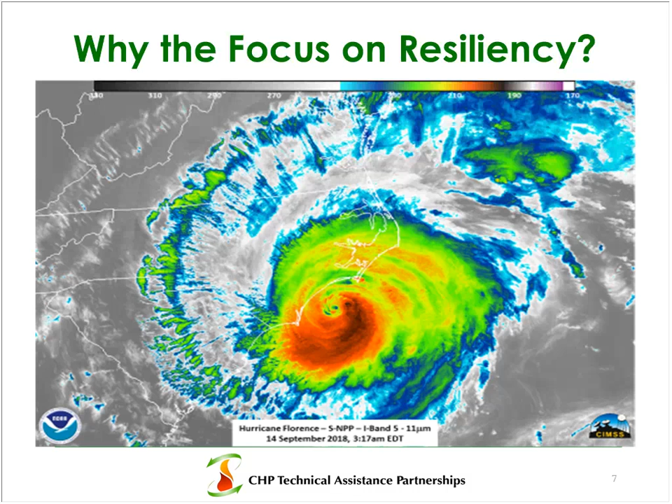This is a map of Hurricane Florence, which affected the Carolinas back in September. It seems like just a few weeks ago. Here's a really cool satellite image of the surface of the Earth. In the north is Virginia, the middle is North Carolina, and on the bottom is South Carolina and northeast Georgia, with a little part of Tennessee on the far left. This is about 3 hours before Hurricane Florence came ashore south of Wilmington, North Carolina.

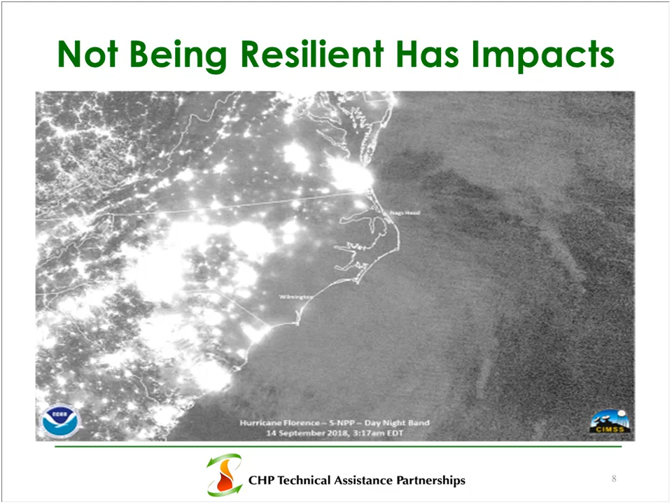The key thing is this: if you go down about three-quarters of the way, you can see a big blob - that's Charleston. Following the South Carolina coast up 26, in the middle is Columbia, then up 77 is Charlotte, with lights going up toward Greensboro. Heading right on I-40 there are lights around Raleigh-Durham, where we're located. But notice it's very dark around Wilmington, which is a pretty big city. That shows the impact to the power supply in the Wilmington area - that whole area was knocked out of power for several days. The storm just sat there for a while, and besides the flooding, it brought widespread damage to the power grid in that part of the state.

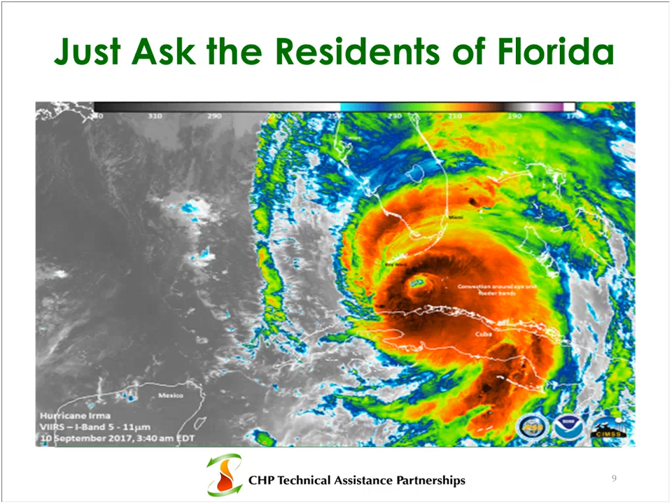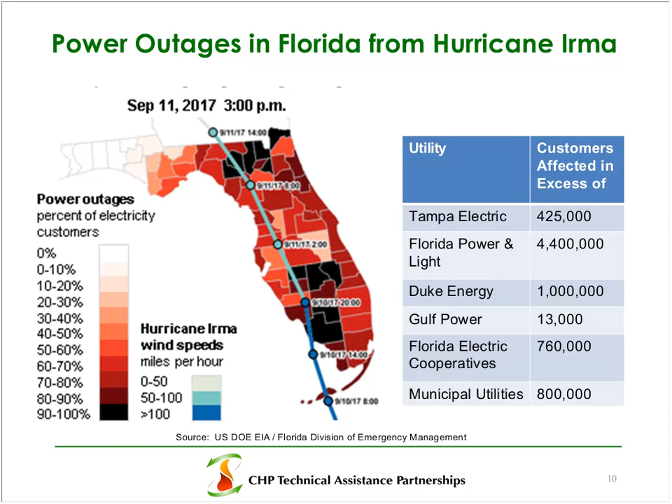Not only cost for production, but cost for raw materials—they get ruined, and so there's a large cost to industry when power is not reliable.

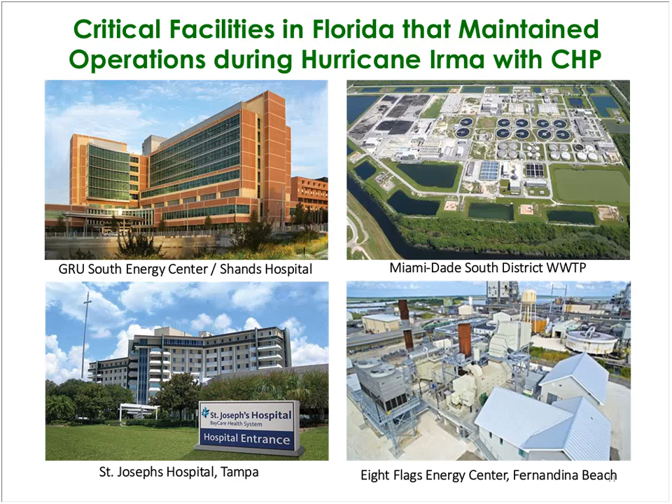It could be a fuel—in other words, what could make that type of energy source not work during certain types of severe events? It could be a fuel supply interruption, damage to equipment, performance limitations during certain types of weather or other extreme events, and then a planned or forced shutdown from that event.

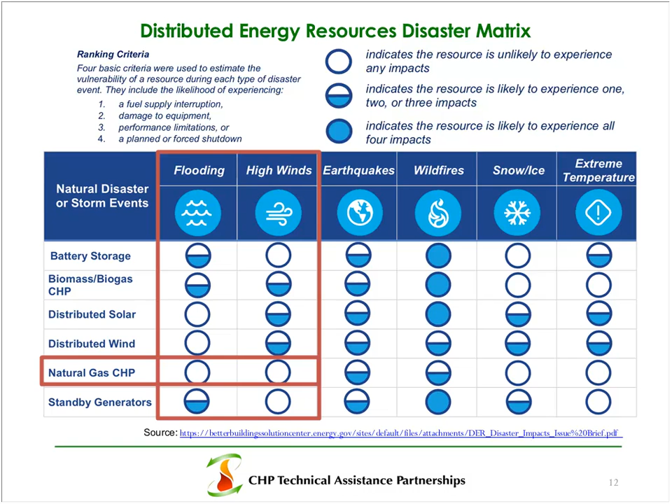So a little bit about how CHP works. First of all, CHP is a form of distributed generation, meaning that it is a source of energy that is located at or near the source of the demand for that energy. It could be on your site or it could be adjacent to the site.

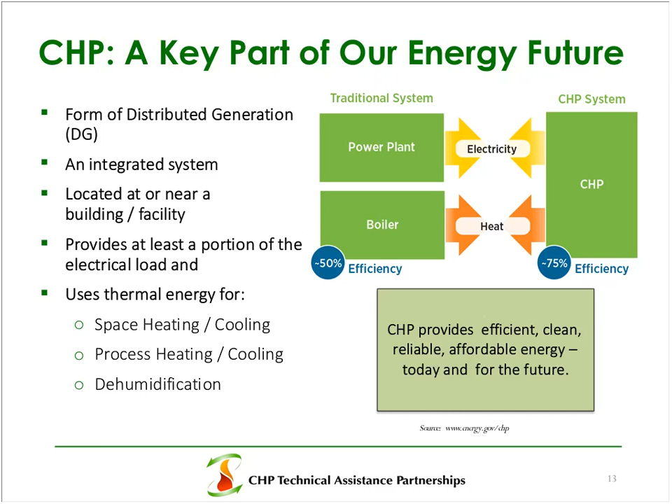So an existing power plant is about 32% efficient when you include the transmission and distribution of the electricity from the plant through the power distribution system to your facility, and then an on-site boiler. So if you're trying to create, say, in the middle there, 75 units of energy between the power plant and your on-site boiler, you require about 150 units of energy.

This is just generic units of energy. With a CHP system, you can provide the same quantity of energy, both thermal and electric, using about 100 units of energy. So there is a savings there. You're generating both the electric and steam or heat on your site.

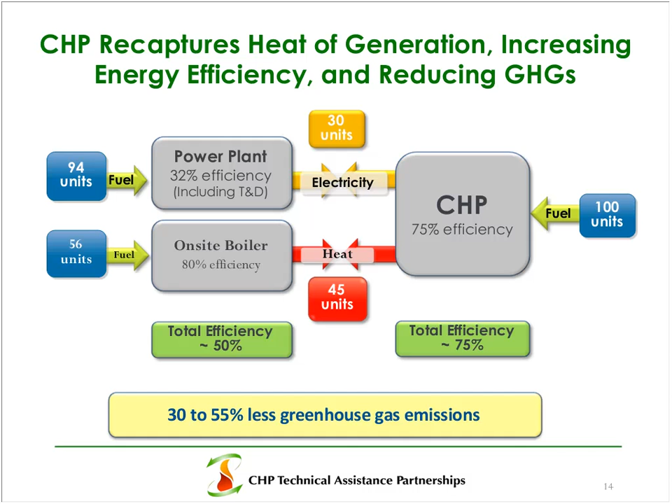And this is basically a simple schematic on how CHP systems operate. CHP systems can operate with any fuel, and our next presentation will be a great example of how it doesn't have to be natural gas or coal or fuel oil or whatever. There's lots of very innovative projects out there that utilize CHP to match their particular operations.

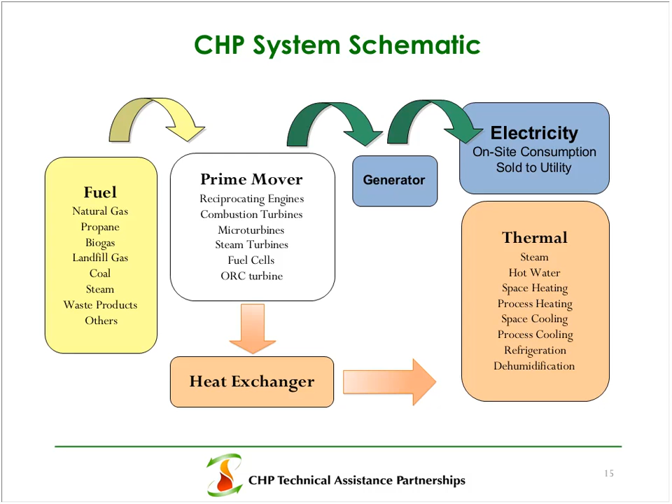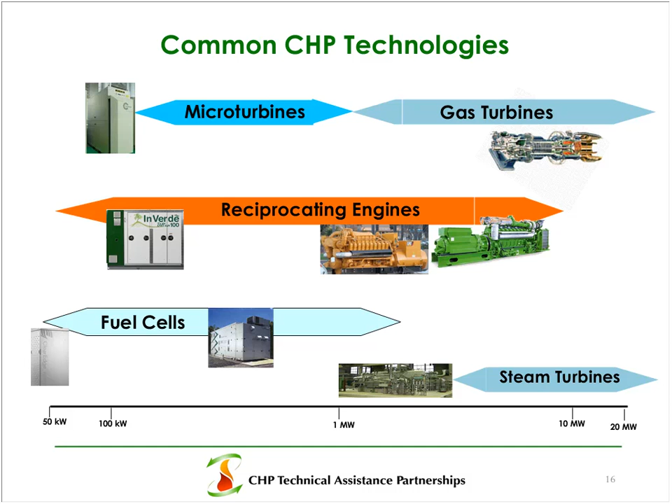So a little bit about some of the additional benefits. We've talked about the benefits of combined heat and power, and how it's a more efficient way of generating energy than the separate generation of electricity and heating or cooling. Its high efficiency translates to lower operating costs, but it also requires a capital investment.

Sometimes that becomes a barrier to CHP project development. We can have a whole separate webinar on financing options and incentives and other ways of helping with that capital investment. There'll be a link available after this webinar to some of the incentives available right now. But that's just incentives - sometimes there's local grants too, depending on your municipality or county. Higher efficiency also reduces emissions of pollutants.

We already talked about how it increases energy reliability, and in some parts of the country where there's grid congestion, it can help utilities manage that congestion by not having to rely on providing all the power needs of a facility - if they're a large electric consumer, if they can generate some of their own electricity.

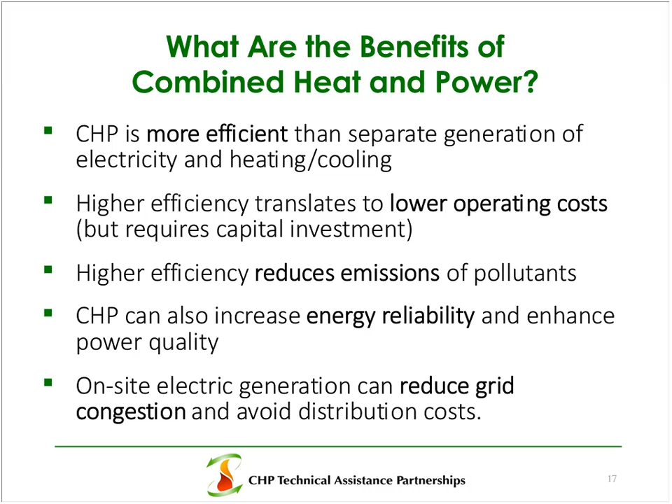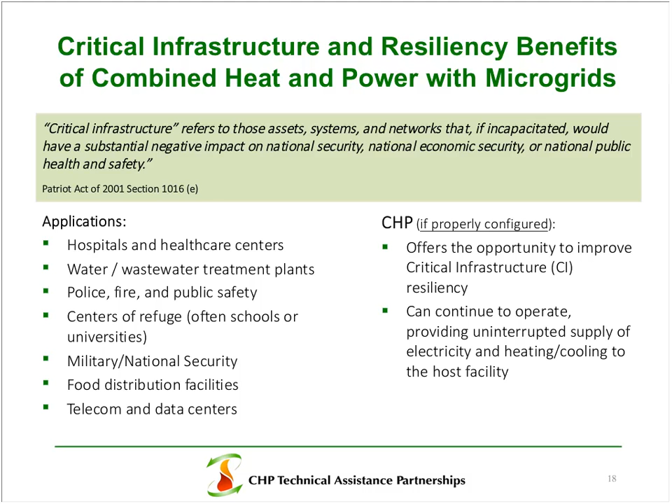Earlier I mentioned when we were talking about Hurricane Irma in Florida, things like schools and hospitals and centers of refuge and chemical facilities and other critical infrastructure. There's a lot of focus on how CHP can help critical infrastructure meet their overall mission, whether it's protecting people, providing that refuge, protecting lab experiments at universities or military bases, or food distribution facilities where refrigeration is needed. CHP is an opportunity for those types of facilities to maintain a source of electricity during power outages. There's lots of stories out there about facilities that have operated for 4, 5, 6 days on their own when the rest of the grid was out. So if it makes sense for your facility, it can be a great investment.

So let's talk a little bit about the current CHP market, first looking at the United States in general. There's about 4,400 sites around the country that currently operate CHP systems, representing about 81 gigawatts of energy capacity. That represents about 8% of the electric generating capacity in the United States, 14% of the electric demand at manufacturing facilities. It avoids a lot of fuel consumption because of the extra efficiency and reduces greenhouse gas emissions considerably.

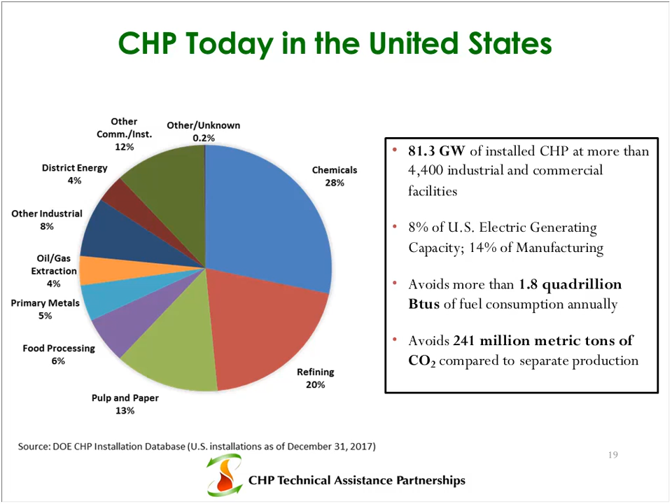So this is currently CHP in Tennessee today - not sure what happened there on that slide. There's 521 megawatts of installed capacity in Tennessee at 19 sites, which represents just under 5% of the total installed capacity in the Southeast U.S., defined by those 8 states I showed you earlier.

But there's a lot of potential in Tennessee. The U.S. DOE had a study done that looked at technical potential around the entire country, and there's about 6,100 sites in Tennessee that has the potential for CHP, which would add about another 4 gigawatts of energy.

Pulp and paper is big in Tennessee too, at 37%, almost as big as chemicals. That 1% for hotels, that's the Opryland Hotel in Nashville - the one CHP system at a hotel in Tennessee large enough to register 1% of the total.

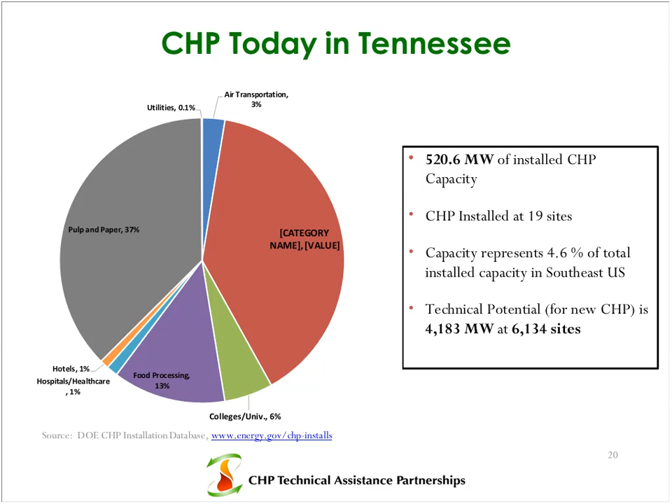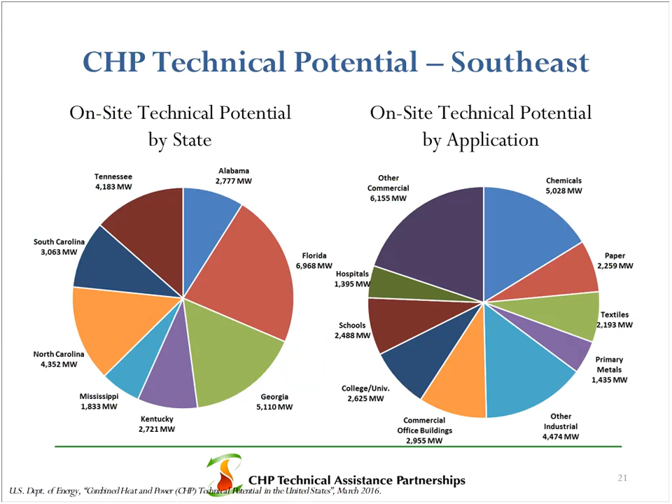And this is basically in the Southeast. I'm not going to spend a whole lot of time on that, but this allows you to compare Tennessee to the rest of the Southeast, and it's pretty consistent with the technical potential by state, and then by application for the whole Southeast region.

So I mentioned a couple of projects that I wanted to highlight. I'm not going to spend a whole lot of time on them, but the biggest one in Tennessee is Eastman Chemical in Kingsport. It's an older facility that's been upgraded several times, pushing just under 200 megawatts of capacity. It's huge—17 boilers, 19 steam turbines. So it's a large system that's been around for a long time.

As the highlights mentioned, CHP is not the lowest upfront capital cost approach, but when evaluated on a life cycle basis, it makes a lot of sense for them.

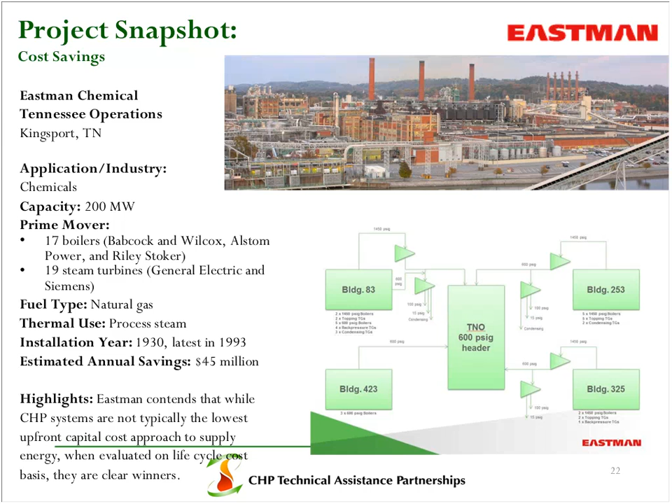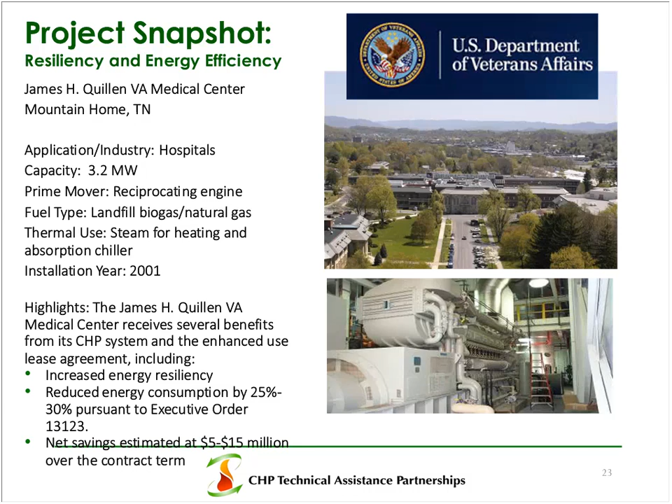As we come toward the end here, I want to go over real quickly the services we provide. If you're a facility that from this discussion or others has decided maybe this makes sense for your facility, you can contact us, and we provide a no-cost screening model, a screening assessment of whether or not CHP makes sense for your facility—whether the technical criteria are met, both in terms of thermal and electric demand, and whether the economic payback makes sense. So we conduct an analysis, provide you with a report, and there's no cost, no obligation.

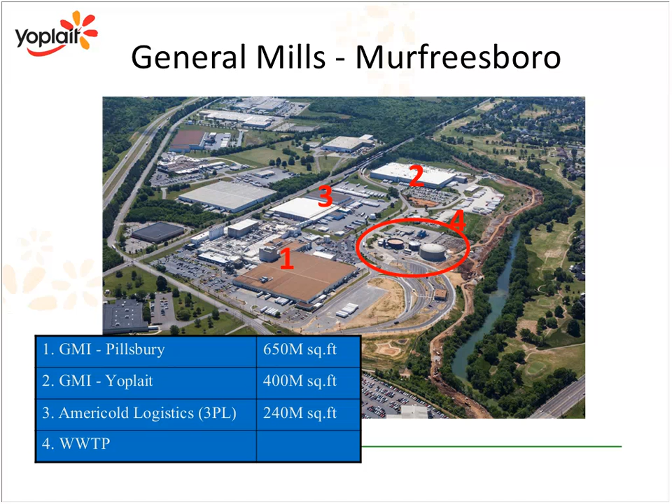Okay, so let me dive into the Murfreesboro plant. Here's an aerial shot of the plant, and again, it's a big campus. Building 1 is really our original Pillsbury plant from the 1970s. Building 2 is the Yoplait plant. Building 3 is a third-party frozen warehouse that's also on our site. And building 4, which is circled, is a wastewater treatment plant that is a key part of this CHP project because of the biogas that we generate there.

And the problem which all Greek yogurt producers have is that to get 1 gallon of finished Greek yogurt, you have to start with 3 gallons of milk. You'll get 1 gallon of Greek yogurt and 2 gallons of acid whey, because the yogurt is concentrated, and that process creates a lot of waste. Traditional yogurt is really a 1-for-1 — a gallon of milk coming in results in a gallon of traditional yogurt. So this was a new problem for us at our plant.

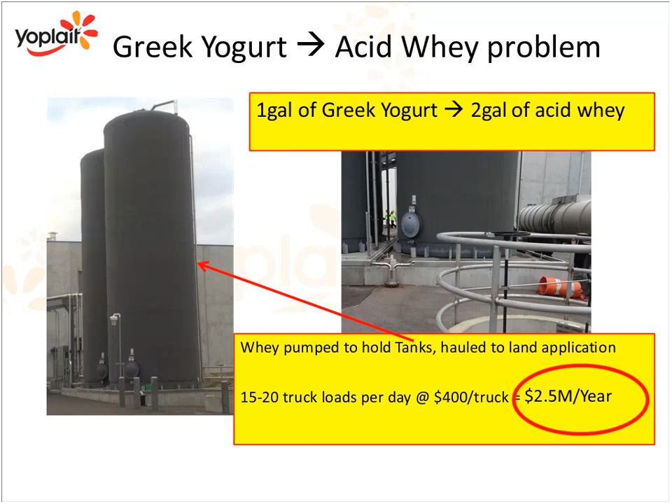And then a side story is that we can send water to the neighboring golf course to help them with their irrigation.

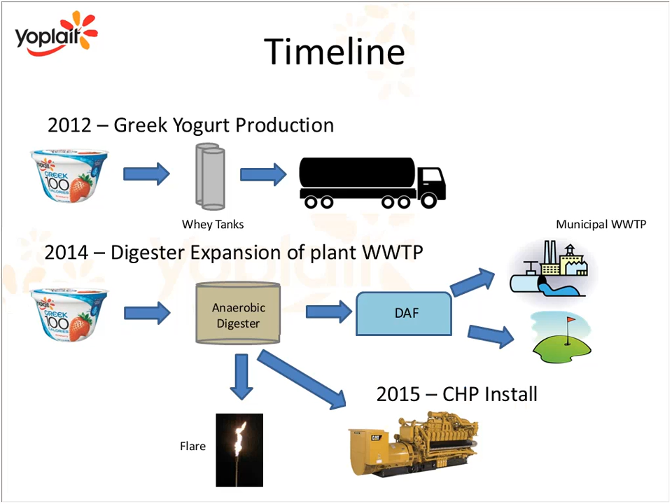The digester, of course, the bacteria in the digester create a biogas, and it was being flared off initially. That's where the CHP comes in, because we had this source of biogas, and we didn't want to just flare it. So in 2015, we continued our work there to expand and optimize our wastewater treatment plant by adding a CHP unit to generate electricity and heat for us. I'll go into some more details of that.

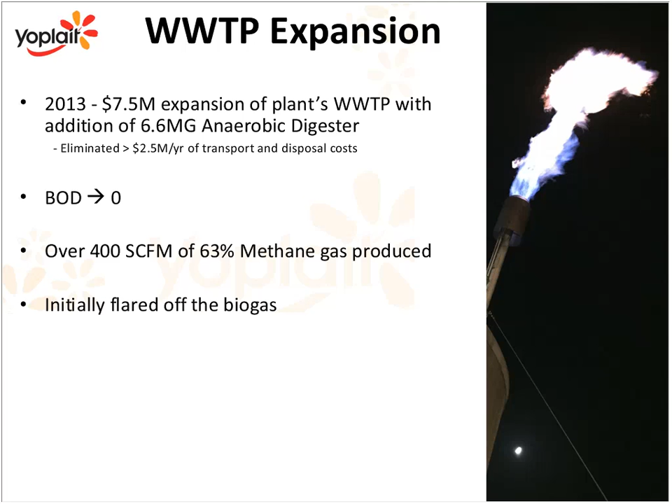In total, sharing some numbers with you, we spent $7.5 million with that original digester project. It's a huge concrete digester, 6.6 million gallons. That eliminated our transportation disposal problem, our $2.5 million problem of whey disposal. It took our BOD to zero, and we had now more than 400 cubic feet per minute of 63% methane gas being produced, and it would spike up to 600, 700, 800 cubic feet per minute, depending on our production schedule.

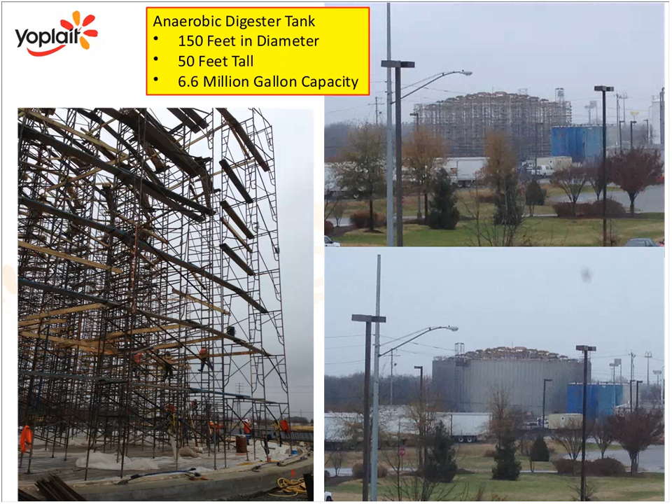This is just showing the digester being built. Again, it's massive, 150-foot diameter tank, 50 feet tall. Besides just the tank, the digester, there was quite a bit of additional equipment that went along with that. This shows the inside of the tank.

And again, in 2015, we were up and running and we were flaring. This is just showing that flare.

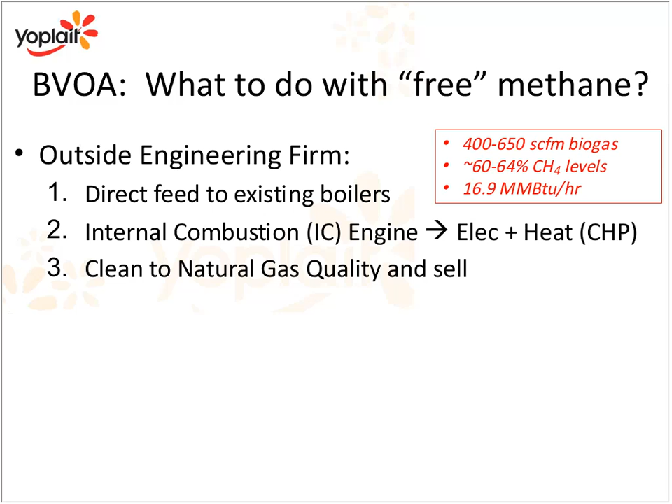So now what to do with that methane? We continued to look at options, and Art just did a nice job explaining all the benefits of CHP. We had some other choices that we were looking at, but clearly the CHP was the right answer for us. We used a different engineering firm to help us with that CHP project that had experience in that field. The company is CHA Consulting Engineers, and you can go to www.chacompanies.com to see them. We're very happy with the work that they did for us.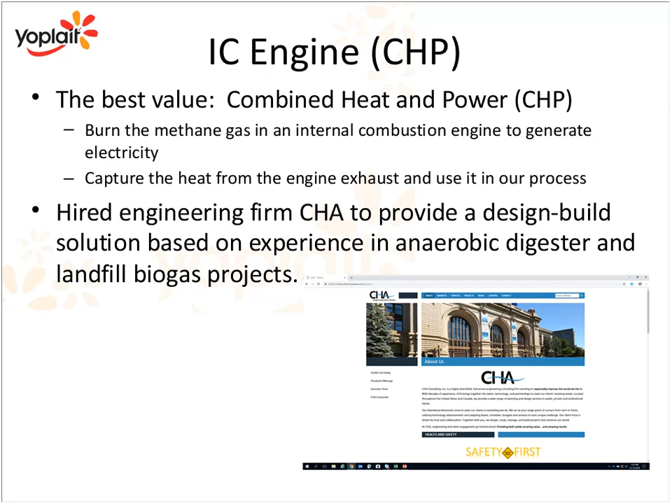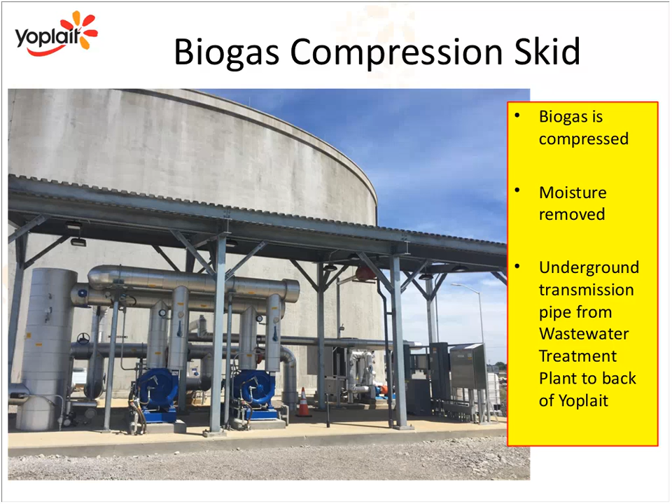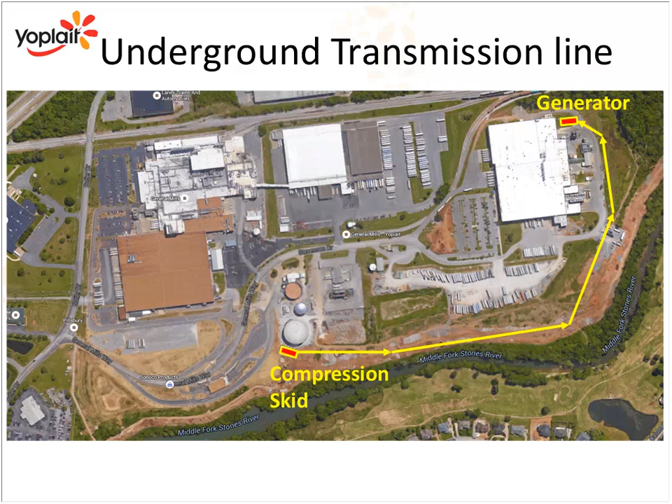It's a couple thousand feet. And the reason we put the generator over by the Yoplait plant is because that's where we wanted to harvest the waste heat, and it just made logistically better sense to put it there. We were confident from our marketing folks that our Yoplait or Greek yogurt sales were going to continue to increase, so we mapped all this out, and we had a plan such that we could add a second generator, which we have not done because sales have actually flattened out and then started to reverse.

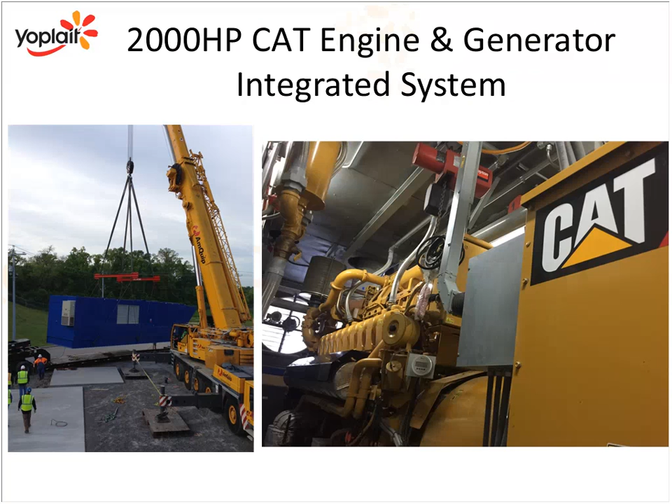But the generator itself is a 2,000 horsepower CAT internal combustion generator. And again, we are recovering the heat off of that into a large hot water tank that we use for all of the CIP processes that I'm sure everyone knows in the dairy how much time is spent cleaning. We use hot water, and that has helped us to not have to burn natural gas in the plant boilers, which was what we were doing previously to generate that heat.

Okay, so just the CHP project itself, which again was started in 2014, was a $5.8 million project, and it originally was saving us over $800,000 a year in net utility costs. As the yogurt production has dropped, it's tailed off a bit, and I'll get into that. But again, it can generate 1.6 megawatts of power at full load. That's about 20% of the Yoplait plant's electrical needs.

And the natural gas offset, because of harvesting the waste heat, reduces our purchase of gas by about 50%. Here's something I was talking with Kimberly about before the webinar started. We took advantage of a federal investment tax credit, a 30% tax credit, and it was able to be applied to the entire upgrade - the digester itself, which generates the biogas, and the CHP.

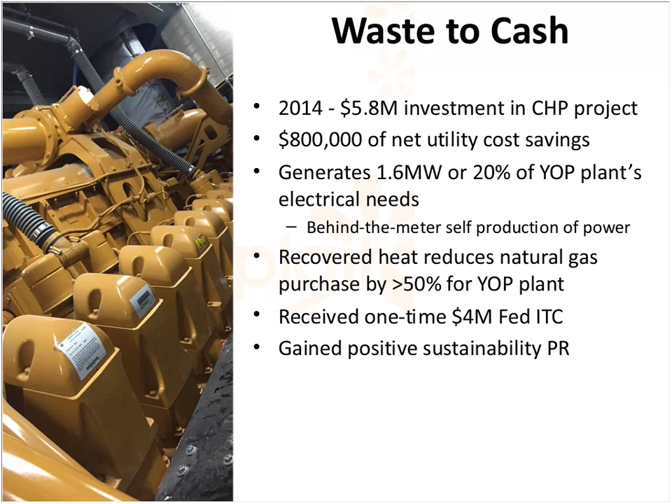We got a lot of positive press, and I'm coming to my last couple slides here. But like Art was saying, there's a nice greenhouse gas offset. You're more efficient, and it's basically creating something positive out of what previously was a waste stream. So we've had a lot of positive environmental press on that.

My update, now that we're looking at how everything has transpired over the last several years, here at the end of 2018, we have generated over 20 million kilowatt hours of power. We've saved over $1.5 million of utility cost, that's through the end of 2018. We've reduced greenhouse gas emissions by 10,000 tons.

Now, if I had it to do all over again, I would have thought about what if our yogurt sales really drop. At the time we were thinking the paradigm was that certainly yogurt sales are going to continue to grow - all the trends showed that. But now that they've dropped, we are running that generator less than the 270 days a year we thought we would.

So now we are looking to add a natural gas modification to the generator such that it can run a combination of natural gas and biogas. We could have done that originally, and if I had to do it over again, I would have, because then we'd be running it north of 300 days a year, which would be ideal for us. We just don't have the straight biogas to do it. In fact, I'm going over to the plant this afternoon, and this is one of the things we're discussing - the progress the plant has made on modifying this generator so it can also run natural gas.

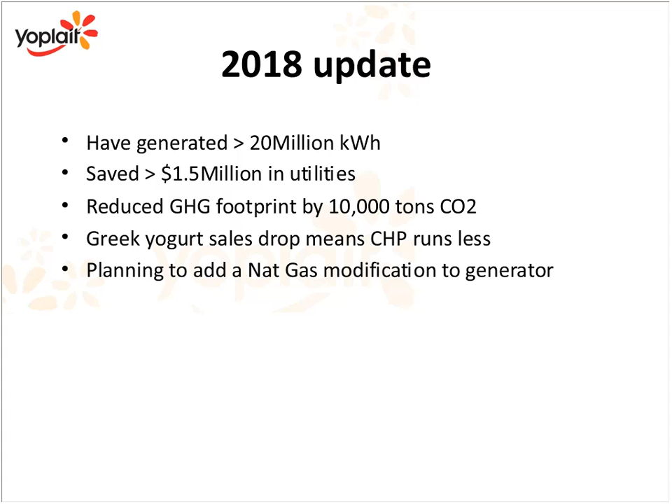Well, cool. I'm not seeing any more questions coming in right off the bat, but I'm sure that was a lot of information. So I'll definitely be giving your contact information along with Art's for any of our attendees that might have some questions or want to shoot some ideas off. I know that Art and the people over at the CHP TAP program would love to assist anybody that has any type of questions or ideas about how to implement a CHP system into their facility.

Actually, hang on, there's another question that just came in. This is for either you, Art, or Darren. It says: do either of you know other incentives available to public or private sector folks looking at CHP or waste-to-energy projects?

Maybe Art could answer that, but I would say that we're considering some CHP at other sites—not because we have biogas, but just because we think there's some financial benefits to do so. There's that investment tax credit, which I think Art says is now 10%, but also there's this PACE funding, which Art probably knows more about than me, that's a way to help get some additional financing for things that might not meet our company's hurdle rate.